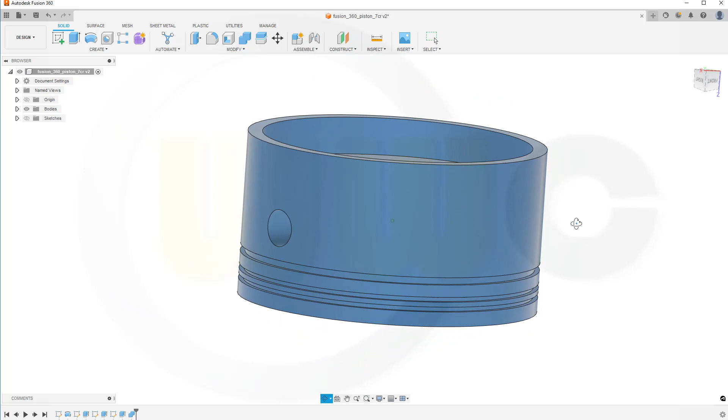Hi, welcome to a Fusion 360 video tutorial. I want to do the piston, the next part for my 7-cylinder radial engine.

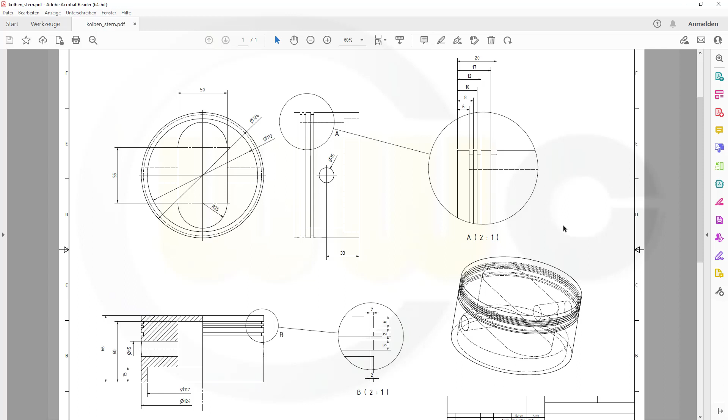Let's take a look at the drawing. Here it is, and you could make a screenshot of that drawing and then follow this exercise step by step if you want. So let's have fun with Fusion 360.

To make it a little bit more interesting, I want to do it with two solids, so a multibody model. Let's start with a sketch on the YZ plane. I will need a profile which looks something like this.

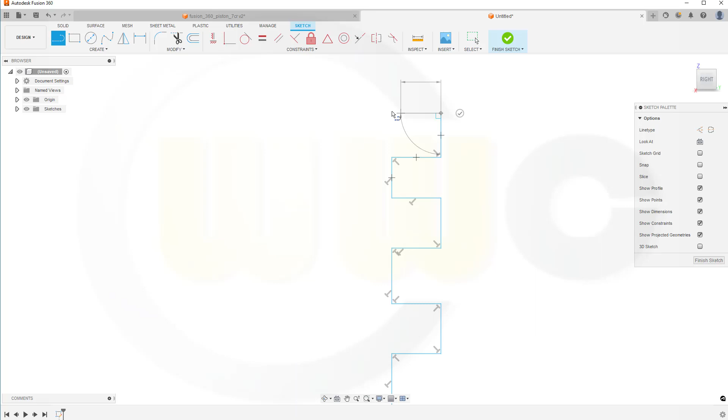Let's try to snap here as well, like that. Now let's make this one a center line, yep, and add some dimensions.

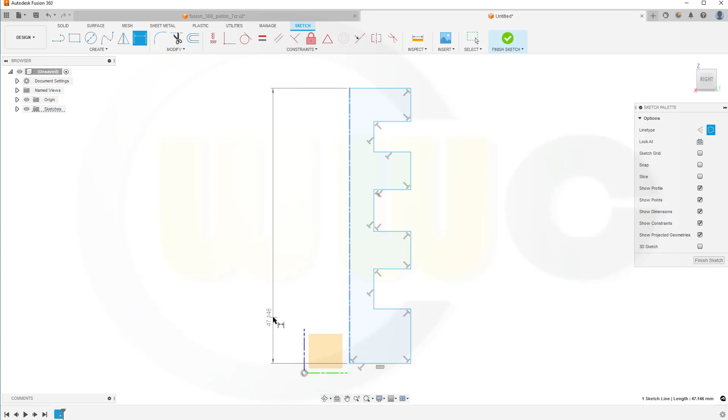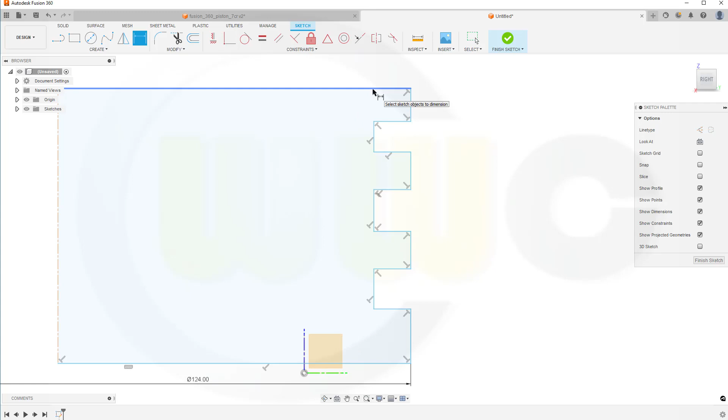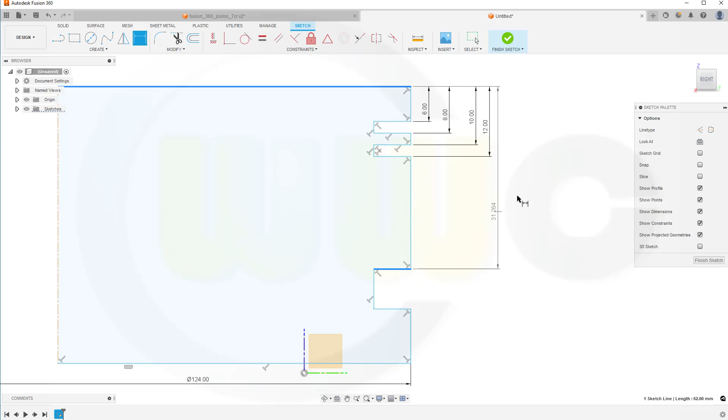So this would be a diameter of 124. This would be 6 millimeter. Next one would be 8 millimeter. Next one would be 10. Next one 12. Another one 17. This one 20. And from here to this one it should be 66.

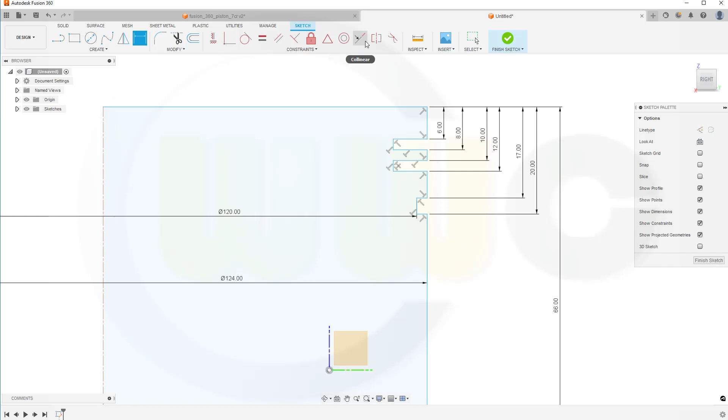Now let's see if I've snapped all those. So this distance should be a diameter of 120. Nope, it didn't work. So let's go for collinear, make this one and that one collinear, this one and that one.

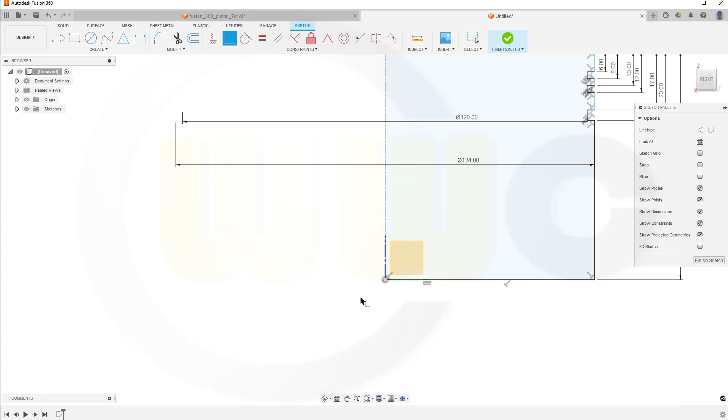And add one more constraint, coincident from this point to that point. Finish that sketch, and seems these are not aligned, so let's go back to that sketch.

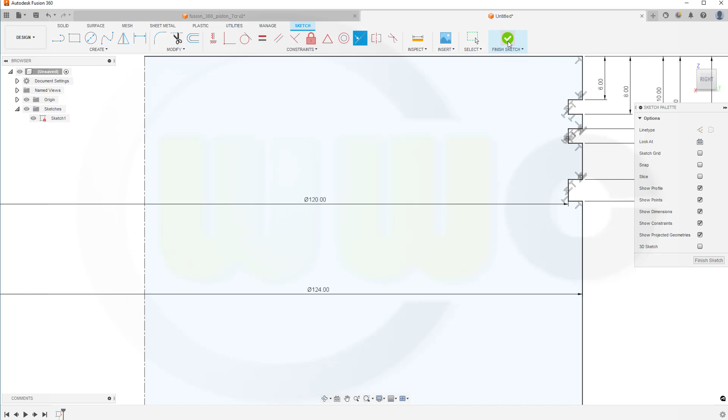Yes, so go for collinear. These, those, and that one. Now it's aligned. Go for revolve 360 degrees and confirm. Great.

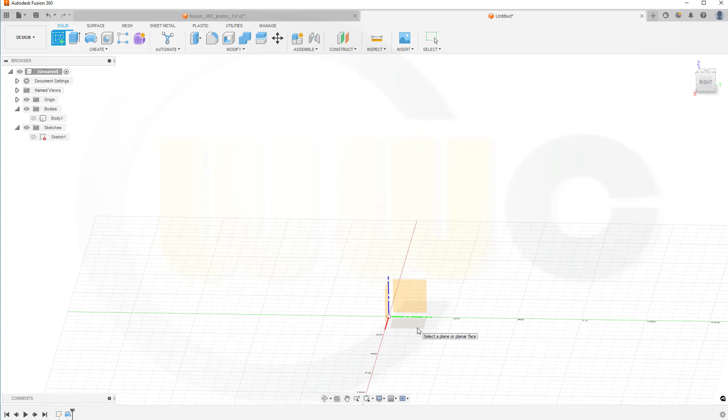Now let's hide that solid and go for a sketch on the XY plane. This should be a circle. Diameter would be 112.

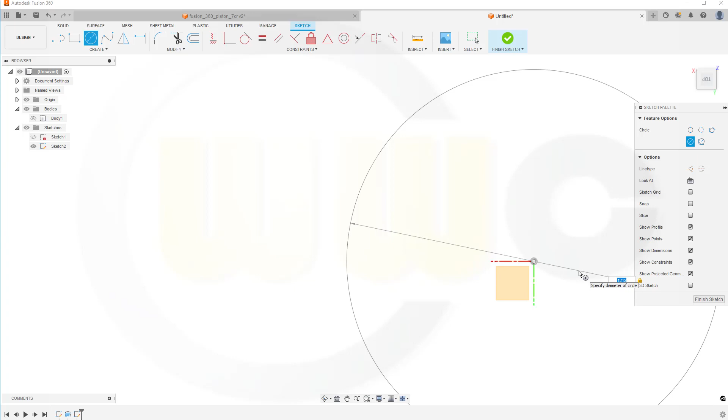Now this did go wrong. 1, 1, 2, like this. Okay. Leave that sketch. Make an extrude. Make it 15 millimeter. Okay, then another sketch on the same plane, that would be the XY plane.

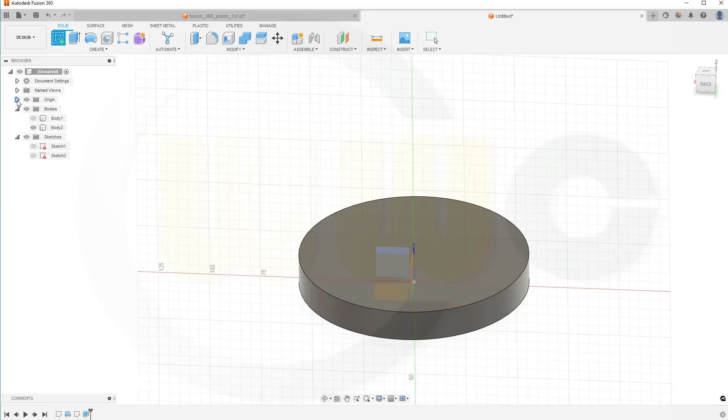I need an elongated hole. Let's see, that's available. There you go, it's a slot. Center to center slot, yes, like this.

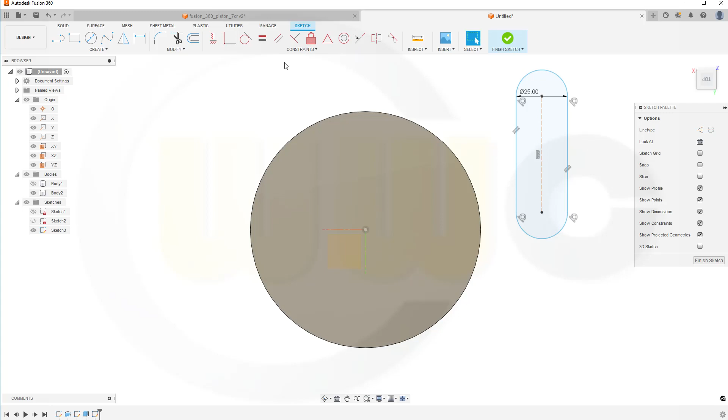Go for 55, and this should be 25. Let's check it out. I need another dimension. This should be 55.

And I want to go for midpoint. So let's see, we have a midpoint here. So this should be the midpoint of that line. Seems to be fully constrained.

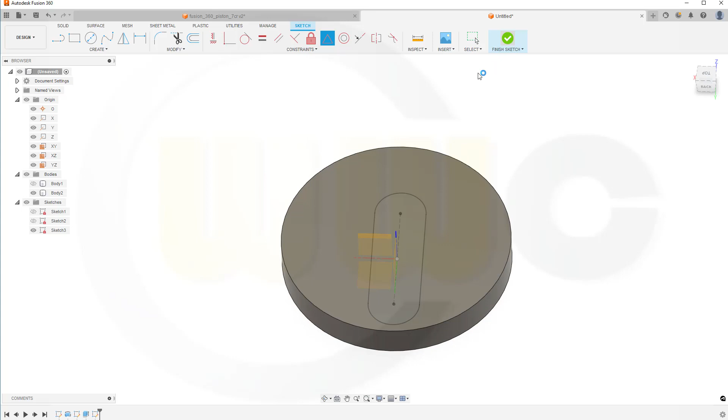Finish that sketch. Go for another extrude. It should be added, so join it. And the distance should be 60.

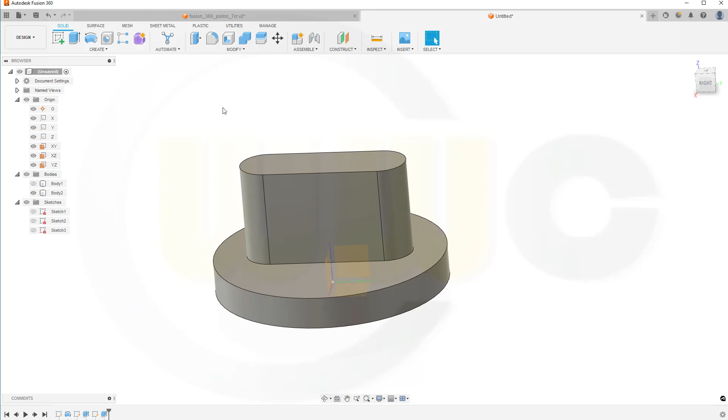Like that. Now, I need another sketch on the YZ plane. So go for a sketch on the YZ plane. A circle, diameter 15.

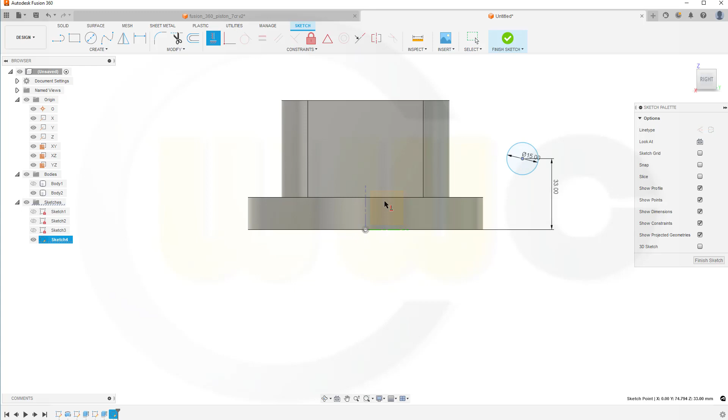Add dimension from that sketch origin to that point. This should be 33. And of course, it should be aligned vertical here. Finish that sketch. Let's go for another extrude with that sketch.

It should be symmetric, and I want to go for the whole length, and the whole length, not a new body, but join it, and the distance would be 140.

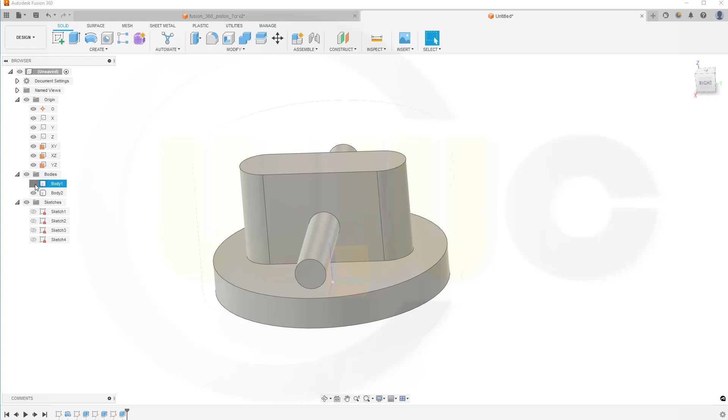Now bring back the other body. Now we can do a combine. I want to cut. That's the target. This is the tool, and confirm.

And I'm done. So I hope this was helpful.